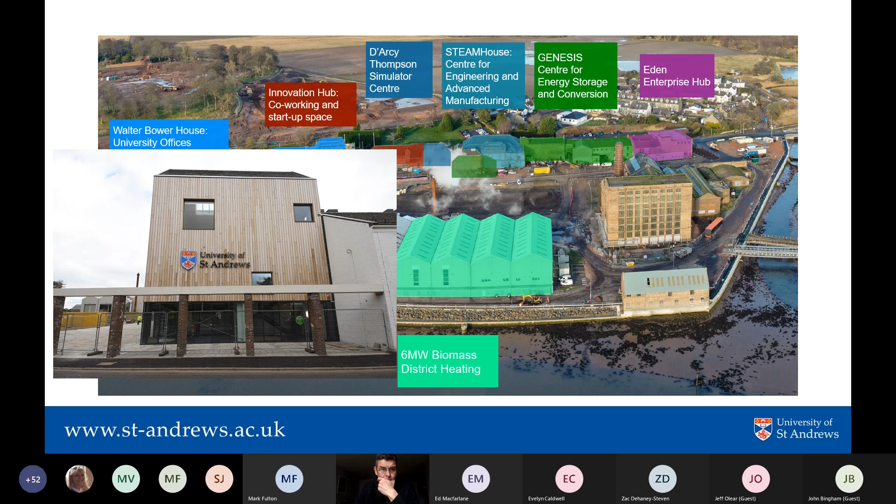So within next year, we will have facilities for batteries and energy storage devices for developing and testing, fuel cells and hydrogen, bioenergy conversions, and electronics, photonics, and sensor devices will be also developed on site.

We're going to offer a space, co-working space for member and user companies. There's funding for an enterprise hub for startup and grow on space. There's seminar and meeting rooms, and there's indeed a place to have coffee, or perhaps, if we're not driving too far, a place to have a beer on Eden.

So the focus is on research to market, and there are two pinch points. One is between research and innovation and scale up innovation, and then there's some innovation to commercial market. We're very keen to drive all these forward, but I think it's fair to say that Genesis and Eden is very much on the low TRL translation, and our neighbouring and partner organisation, MSIP in Dundee, focuses very much on translating innovation into commercial market. We think there's a really nice synergy that's almost been serendipitous, but I think it gives us a very clear objective of the way forward and the Tay Cities region pathway.

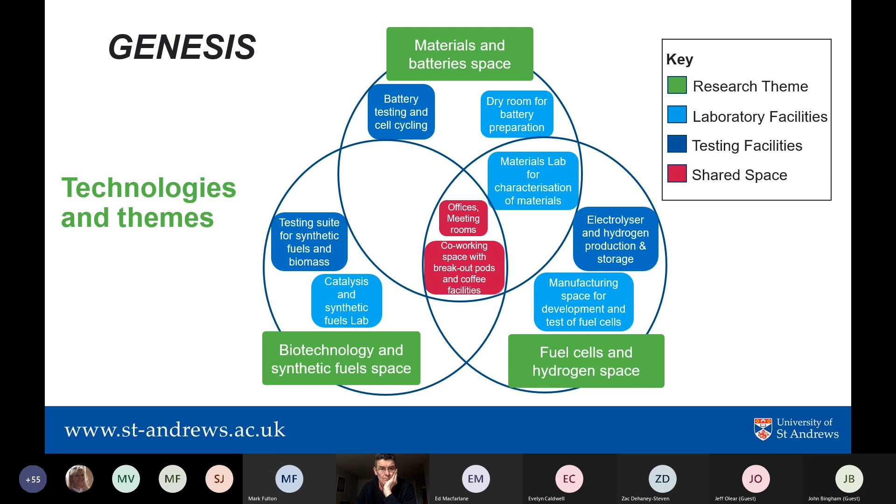In each of these areas we have testing and fabrication facilities. In the centre we have offices, meeting rooms, and co-working space. This goes on in an ecosystem in the east of Scotland, and indeed all of Scotland.

It's very important that we tie this in nationally. In terms of Genesis, the role is looking to companies with new products close to market, or those looking to develop new solutions. That feeds into the Genesis Centre. University research, know-how and expertise comes into that also, and they work together.

Then we have test and demonstration workshops, analysis and verification labs, and scale-up facilities for manufacture. So hopefully, if it's a small company wanting a bit of a leg up to get started, the Genesis Centre would provide a very good home for the initial stages of developing, say, a new company or a spin-in.

Outputs would be jobs, and I think key is that we have a core staff that's local, trained and expert, and that's something we can offer and seek to offer in Scotland, in places like St Andrews or Dundee, where there's a very skilled workforce available, and often a need for reskilling. With the oil and gas industry translating into renewables, this is probably more universal.

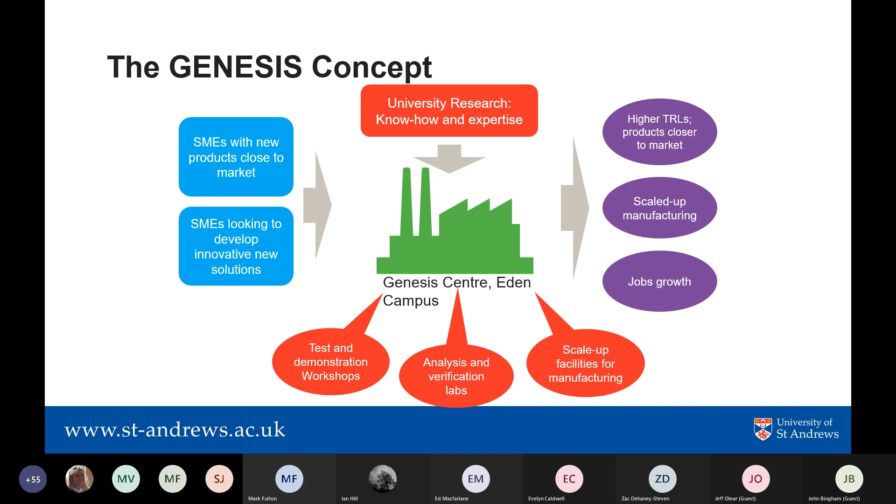We look at scaling up towards manufacture, and the key thing is to bring products closer to market. So a couple of examples. First, on hydrogen: the Hydrogen Accelerator is an organisation recently set up by Transport Scotland. It's very much about policy, removing gaps, and enabling activity - it's really getting technology rolled out.

We work very closely with Scottish Government, and we try and bring together the councils and companies to develop new hydrogen technology. So we can provide expertise, especially on things like safety or learning from past mistakes.

Our team will give support. We will try and coordinate and bring together key initiatives - for example, the rollout of buses, or indeed the hydrogen train development that we're involved in. The idea is to deliver decarbonisation and jobs in Scotland.

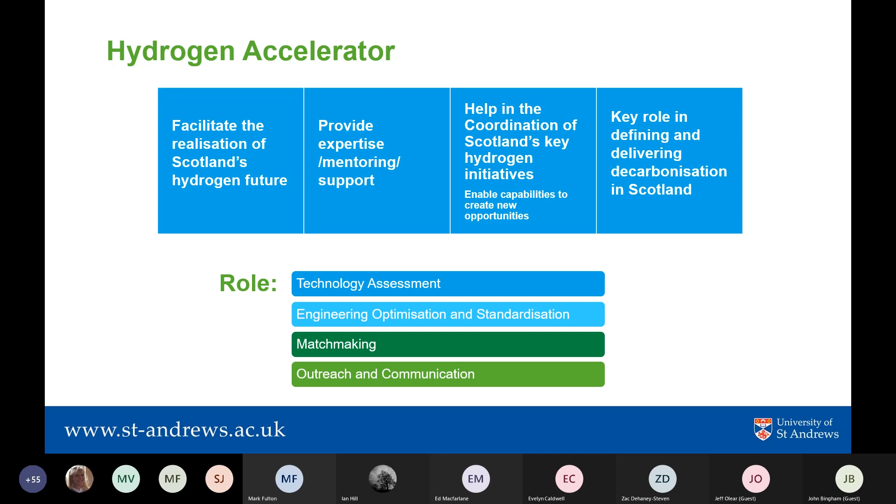The role, first of all, is technology assessment - you need to do the right things. We'll help optimise and standardise engineering, and that may be by finding appropriate partners. We'll also matchmake: any sort of hydrogen rollout needs hydrogen production and hydrogen use as an absolute minimum, so you really want a cohort to deliver. We will also be involved in outreach and communication of hydrogen.

Following on from that, we've set up a technology support facility, which has recently been earmarked for funding. We seek to buy in various pieces of equipment, and are still open to advice as to what small companies might find useful to have access to, even if they can't own them themselves - things like tape casting and screen printing.

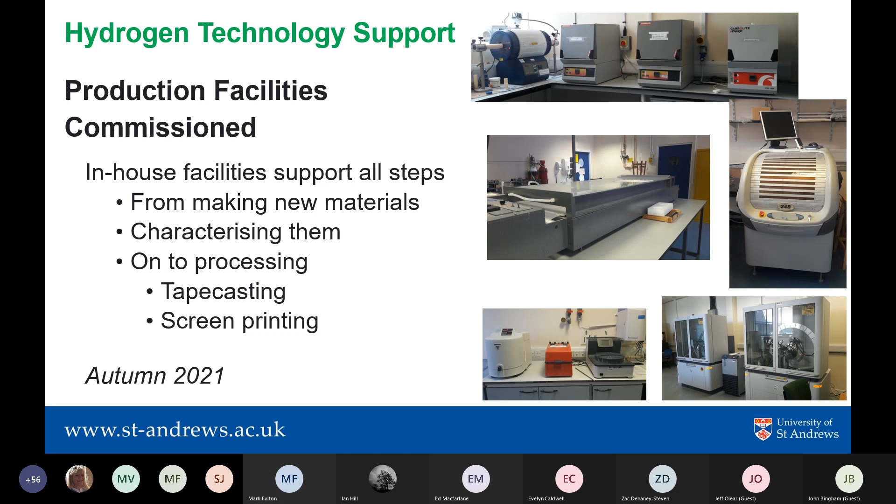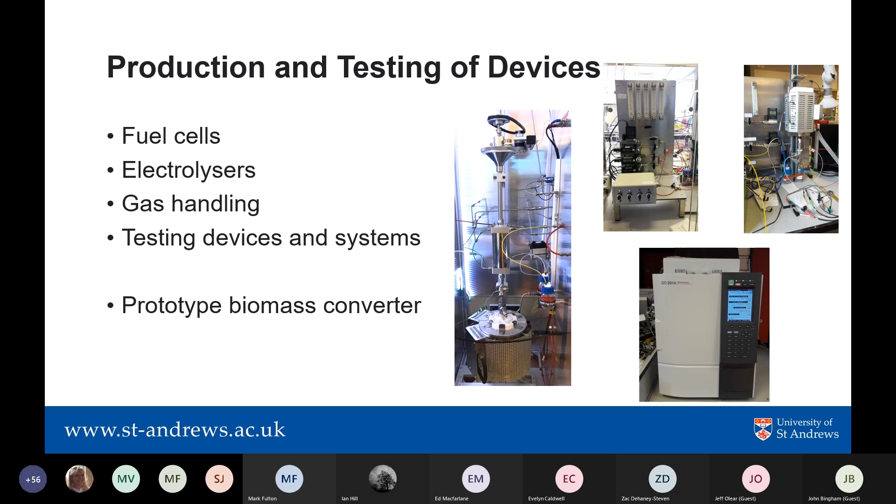I think a 3D metals printer is now very high on the list. We will have furnaces, tape casters, a screen printer available - building to a larger scale than things we have available in the university in the North Haugh. We also seek to manufacture and test devices, and we will have capability for battery testing, as well as fuel cells, electrolyzers, gas handling, and there's also interest in a biomass converter, which is also related to fuel cell technology.

The most advanced aspect is perhaps battery scale-up, and scaling up of batteries is something barely done in the UK. AMTE in Thurso are probably the only company really doing this, but there's a lot of interest in gigafactories and such things further south, and of course the likes of Nissan has got some capability as well. So there's a range of things.

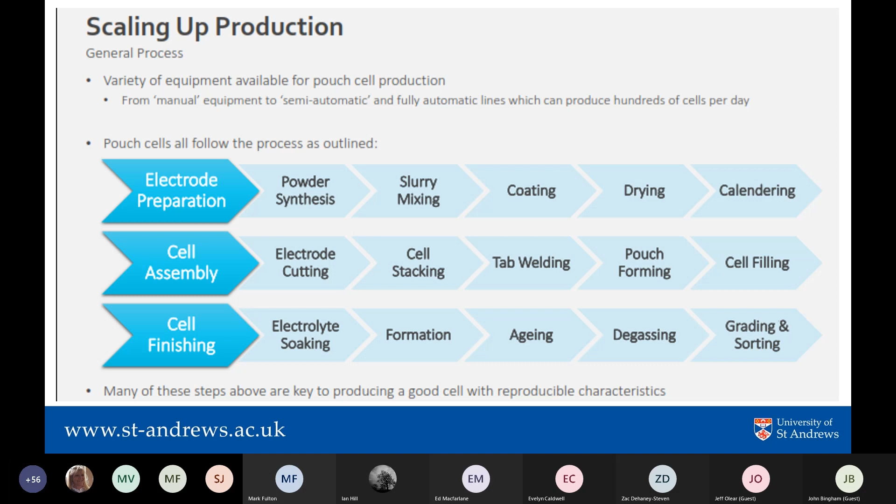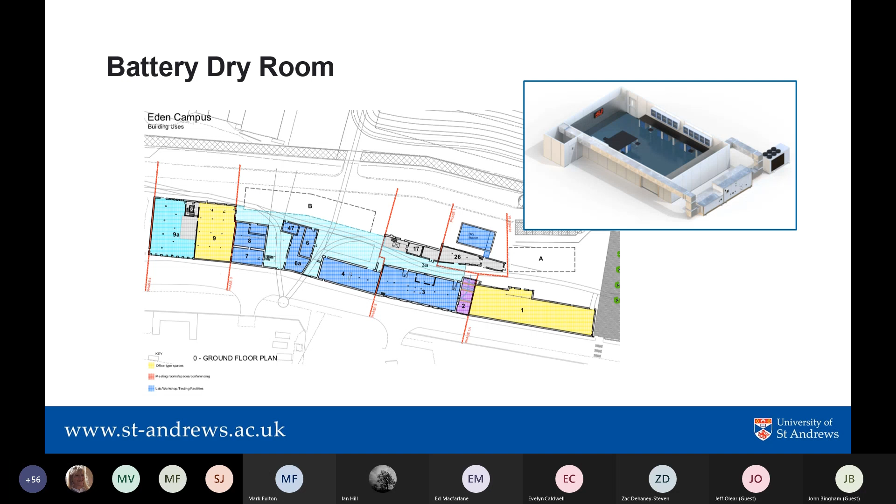Electrode preparation has five different steps: cell assembly, cell finishing. Much of this needs to be done in very low humidity atmospheres - water is really the biggest enemy, and we've developed facilities to do this in dry space. We've just commissioned a dry room facility to be built, coming online in May or June of this year, related to the genesis part of the Eden development.

Within that, we've bought equipment from China, and we've got a full set of equipment such as calendering, milling, casting, testing, and forming - electrochemically forming batteries. This will be for prototype lithium and sodium batteries.

The dry room has to be at least minus 40 degrees dew point, so very low humidity. Much of the equipment is in there, from calendering onwards that will be inside. The casting will be in the next room, but also in a dry facility, though not quite as dry. The idea is to take raw powder to finished pouch cells.

These are sort of going towards A5 type cells, it'll be 300 by 100 or 150 by 100. It complements materials development and coin cell testing, and this should be up and running in the summer.

It's not just that we want industry users, it's really focused as majority of the use is for industry developers. We're very open to companies coming in and getting new chemistries manufactured over a week or two and showing that.

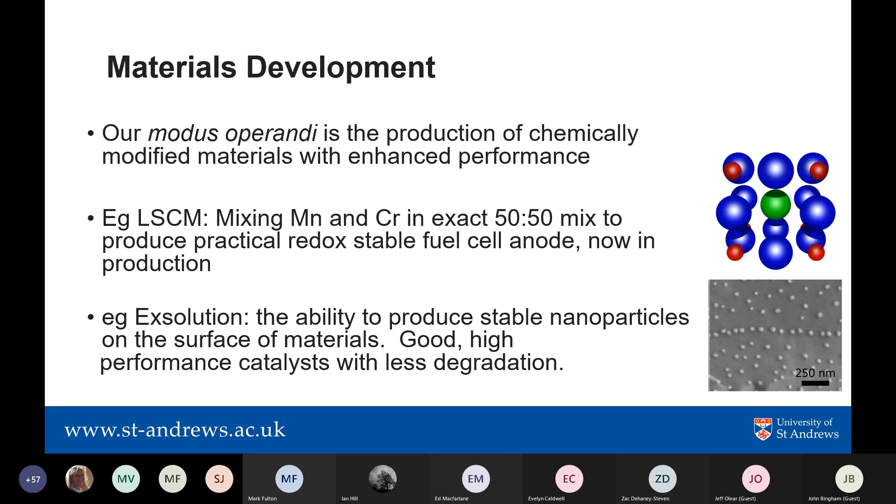Electrolysis, and of course companies involved in Eden will have access to state-of-the-art facilities like electron microscopy and X-ray diffraction, something that you might only use one or two days a year. We're very keen that you can come and access our facilities, and again, they're set up with a view to being open to industry usage.

We're very willing to talk, and the more we talk to industry, the more we learn about what the real problems are. So it's very beneficial to us and hopefully beneficial to people we talk to. We've got expertise, facilities, and experience, and we still have capacity. Even with COVID, we're running about half full.

So you can contact us on Eden Campus or H2 Accelerator, Hydrogen side, and there's also the website. I guess these slides will be shared afterwards. So I think we're open for questions, and I'll stop presenting myself, and either Sneh or Jeff can take over for the next bit.

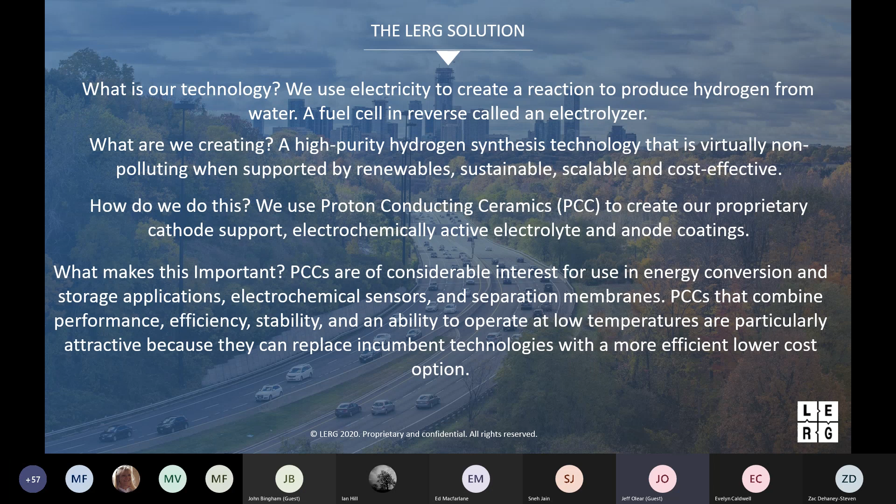We use proton conducting ceramics to create a proprietary cathode support, and we also use the same for our electrochemically active electrolyte and anode coatings. What makes PCCs important? It's going to be the next material used in the electrolyzer field. It's great for energy conservation, conversion and storage applications, as well as sensors and separation membranes. It has the efficiency and stability that we're looking for, and it has the ability to operate at low temperatures, and that makes it attractive in this field.

Our company initially started off with a few scientists working in the St. Andrews lab space under John Irvine. We had about 300 square feet there where we did our material research and selection processes. We started working with how the material worked in different environments and operating conditions.

And as the team grew, we moved into a 7,000 square foot facility in Dundee. You can see we have a state-of-the-art facility there with all kinds of fume hoods and analytical equipment like an SEM and high-powered microscopes, dilatometers, and everything else under the sun in that facility.

The LERG team has selected materials that meet the required performance parameters and understands their nuances to make them perform. The team has been together for a long time. A good percentage of them came through Professor Irvine's group, and they work very well together.

Really what that means to us is we can iterate through a lot of different experiments on site in order to make improvements real time and very quickly and try to get the results that we want out of our materials. We go from extruding the tubes themselves to dipping, coating, and firing right up through the test stand right there in one facility. So it makes it very quick and it makes data collection very reliable.

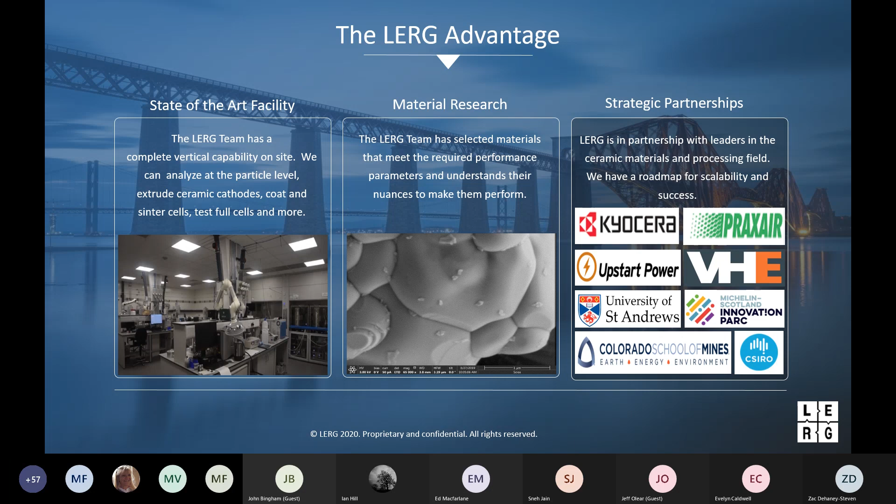What we've accomplished so far in the last 2 years is, early on we had a lot of hurdles with proton conducting materials. The fabrication of the materials was not that stable. It was difficult to get them to sinter properly. And then once we got past that hurdle of having them sinter and having the coatings adhere to the cathode, it became difficult to test them in the operating environment that we wanted to. But the perseverance of the team and the knowledge they had with the materials and the research they did and the collaboration they had with other universities and other partners allowed that hurdle to be cleared.

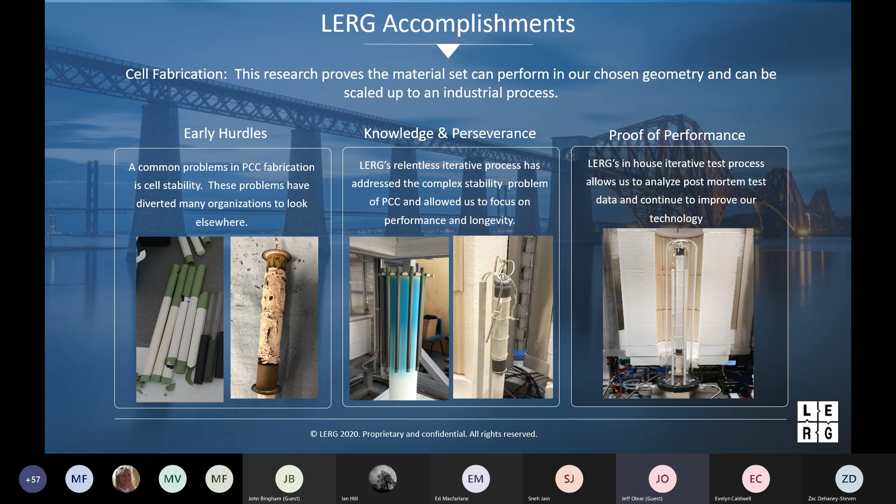Now we're testing cells in excess of 1,300 hours with very impressive performance numbers. As you can see here in these pictures, the cells are well on their way to the commercialization scale. All these pictures are in-house, so we have all these testing capabilities in-house. We're trying to expand that, which is why what Professor Irvine said about his future test capacity is very interesting to us.

Once we felt comfortable that our cell technology was at a certain TRL level where it's robust enough and stable enough for it to be put through a number of different hurdles, we had to try to see if we could scale it up. So we partnered with Upstart here in the States. They have a lot of experience with stack development at the early stages. So we lengthened the cell, we improved the cap designs and the cathode interconnect designs, and we started to develop a stack.

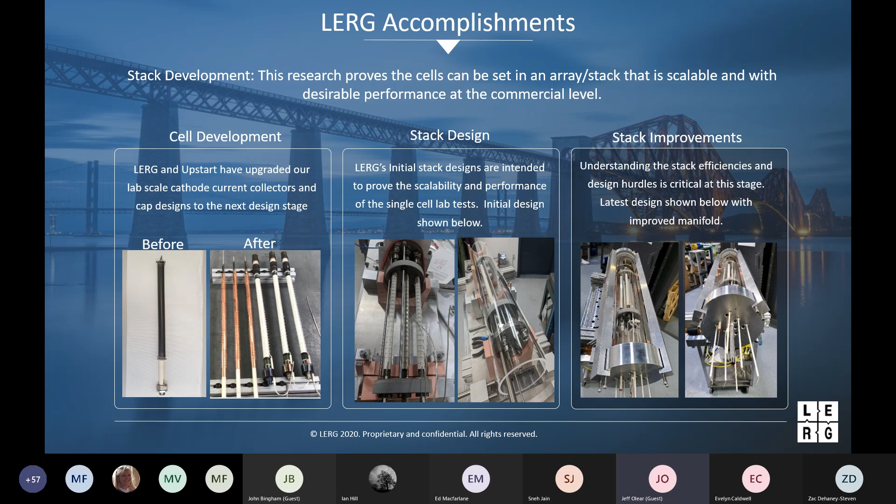In the future, we'll continue to do stack tests. We'll work with Kyocera and Upstart to progress the stack design and hopefully make it more industrialized and commercialized. Kyocera is also working with our team in order to take our coatings and make them easier to apply to our cathodes and make them thinner and stronger. So Kyocera is actually engaged with us there in order to improve that technology.

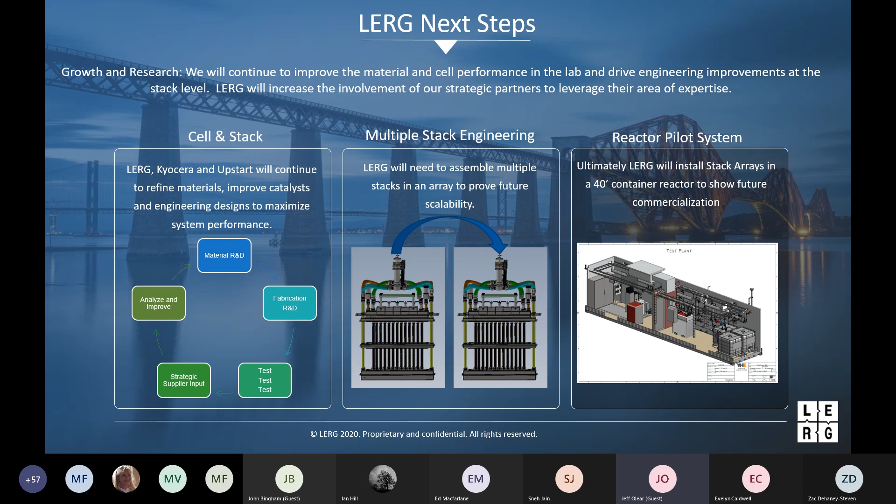And then once we get stack design up and running, our goal is to have multiple stacks together and eventually get them into a pilot system of, say, a self-contained 40-foot commercialized electrolyzer.

So I think we're open for discussion now. Like I said, we're located in Dundee, Scotland. Most of the staff came through Professor Irvine's group out of the University of St. Andrews, and we still have a great partnership with them in sponsoring some students and working with John and his group to advance our technology.